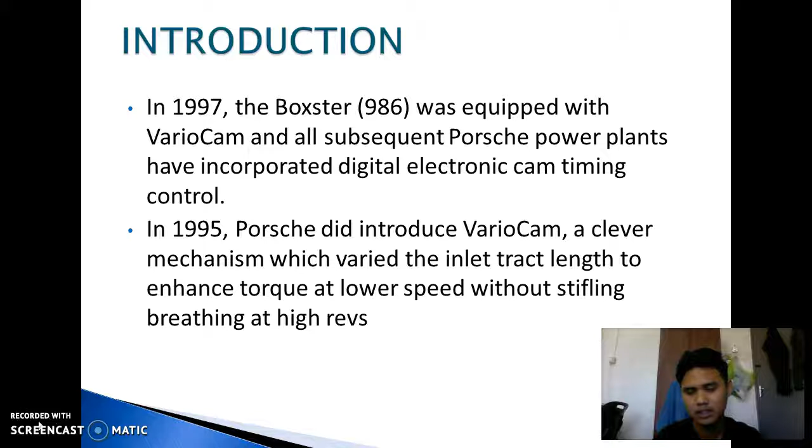So the Variocam system is very simple. They only adjust the intake valve, which can adjust the opening and closing, how big or how small. But for the exhaust valve, it is already fixed.

So this is the theory of operation of the Variocam system. This is the basic system of the solenoid. Here is the mechanism of how the solenoid moves upward and downward. Before that, let's see a video first to better understand how this solenoid works.

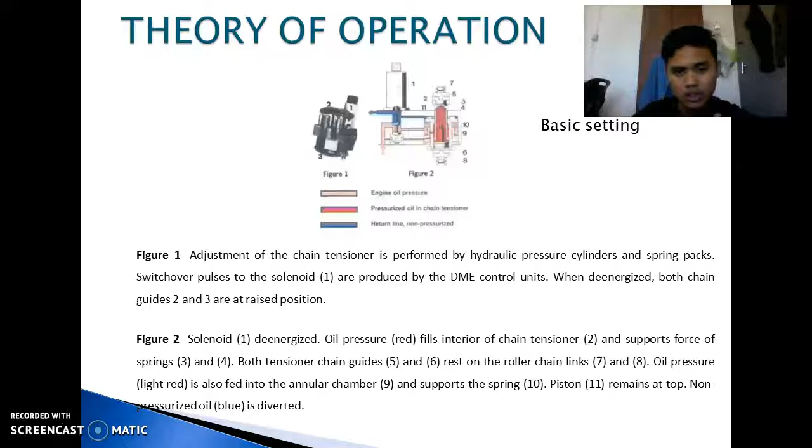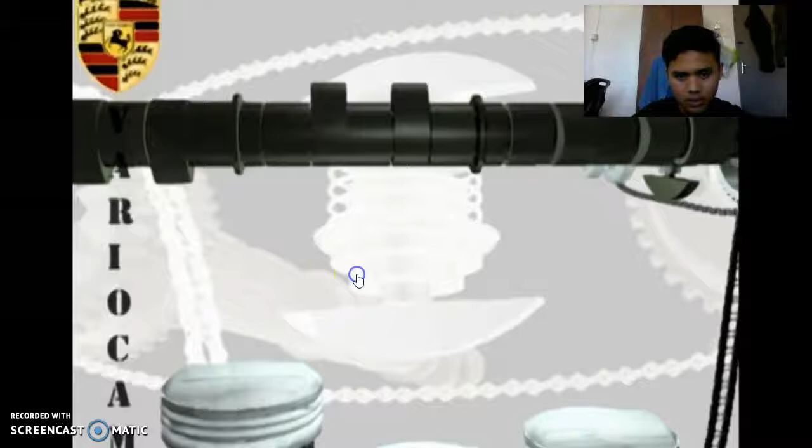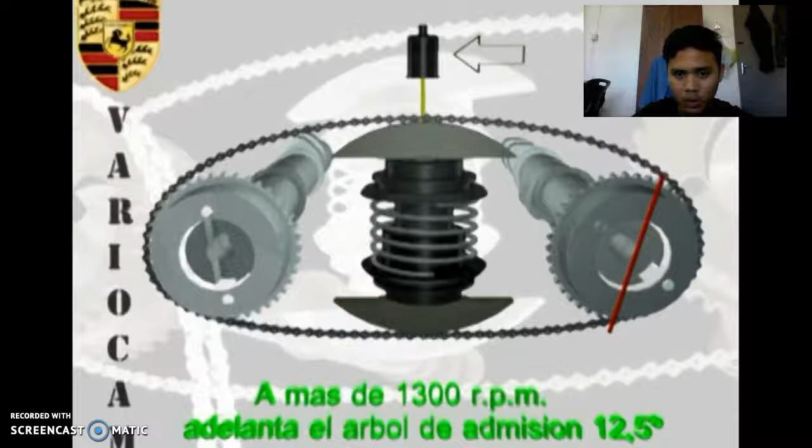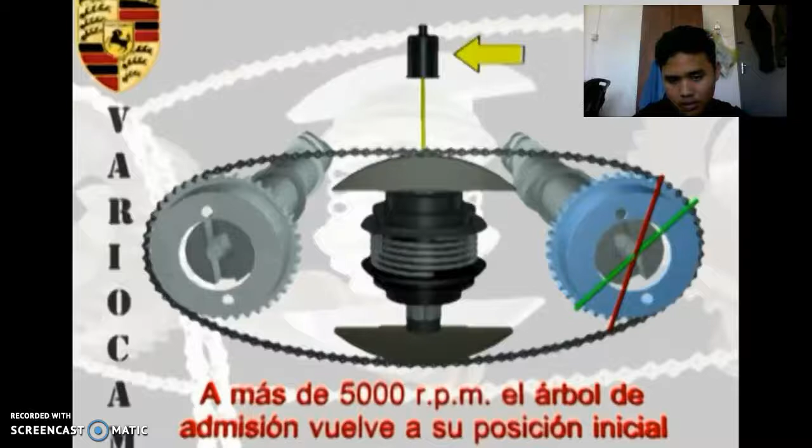So this is the arrangement of the camshaft and the piston and so on. This shows how the solenoid goes upward and downward, and what effect this has. For 1300 rpm, the solenoid will go downward. For 5000 rpm, the solenoid will move upward, and this can affect how the valve opens and closes.

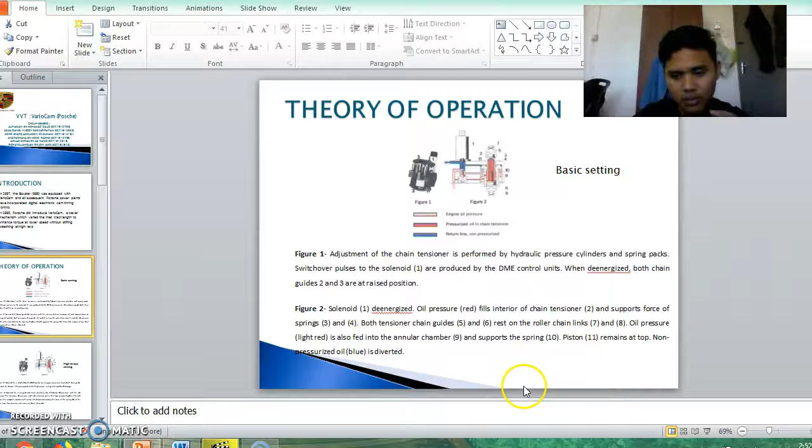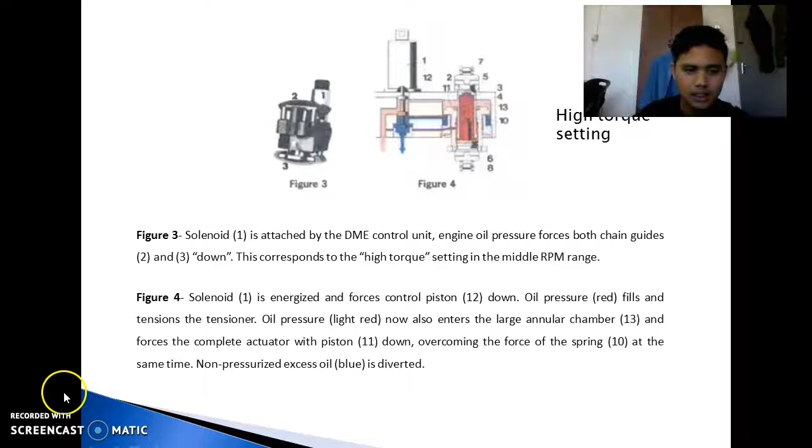So next, this is the high torque setting of the solenoid itself. This is the mechanism of how the solenoid goes upward and downward for the high torque setting. So this is the diagram for the Variocam.

After Variocam, Porsche introduced the new technology, which is Variocam Plus. Variocam Plus is more complex than Variocam because in this part they have 3 cam lobes. Let's watch this video first to see how it works.

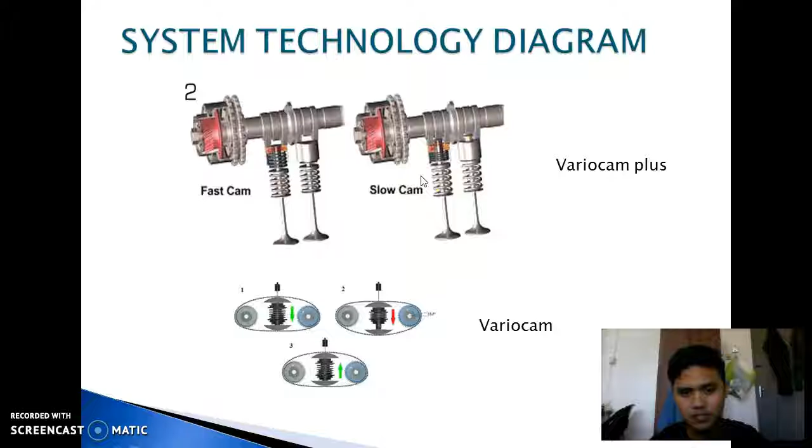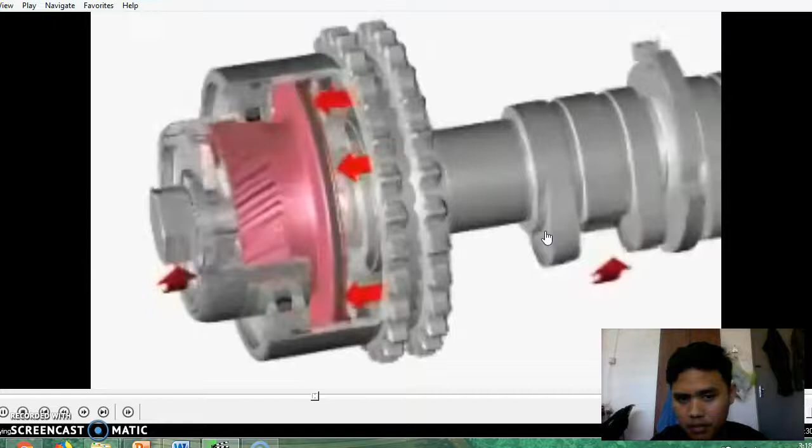Okay, this is the setup for the Variocam Plus. Let's see here, it can change the coordinate of the camshaft to the left and to the right. So how does it happen?

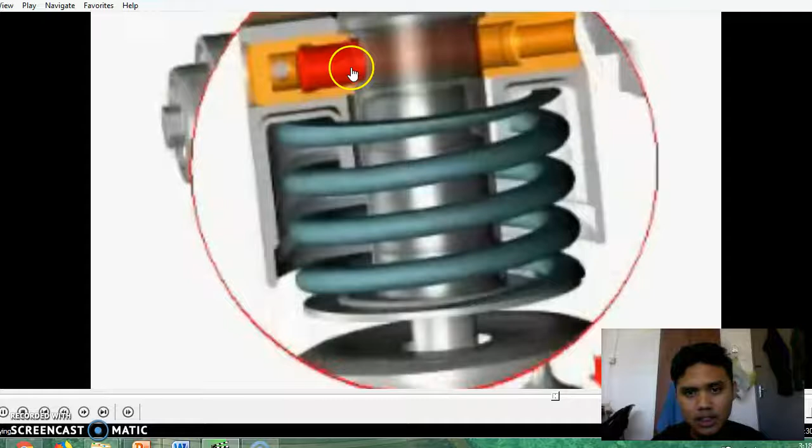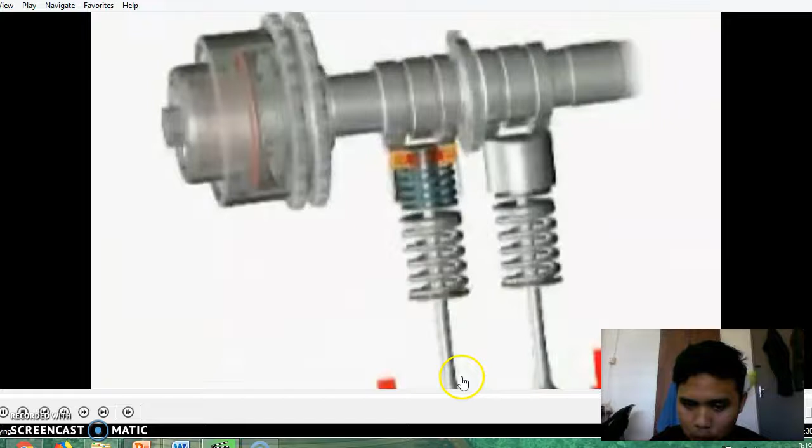This is for low RPM, where the valve will open only a little bit, so it can save more fuel at low RPM. As you can see here, there's a solenoid or hydraulic valve. For high RPM, the valve will open bigger, so the gap between the valve seat and the valve itself will be larger. So that is how it works.

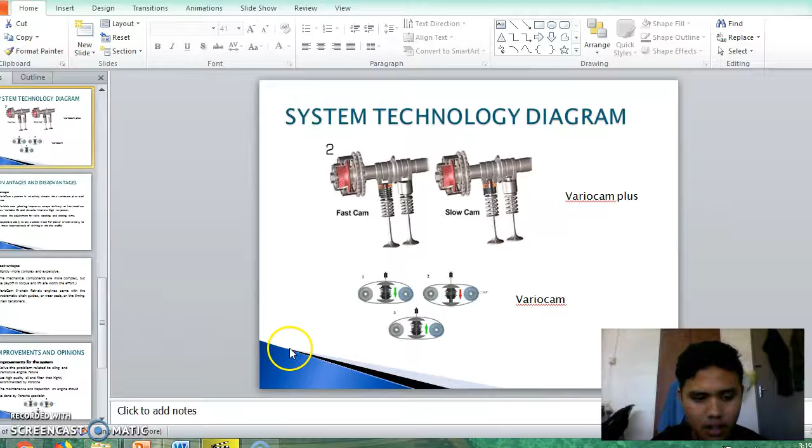So here are some advantages and disadvantages. For the advantages, the Variocam system is relatively simple compared to Variocam Plus, which as we saw previously includes the mechanism for how the valve opens and closes. For the Variocam system, they only have the mechanism to tension the chain and loosen it. Second point,

variable cam phasing improves torque delivery at low or medium revolution. Variable lift and duration improve high revolution power. Thirdly, it allows precise adjustment for valve opening and closing time. And lastly, it responds quickly to any sudden need for power, or conversely to a more reserved style of driving in city traffic.

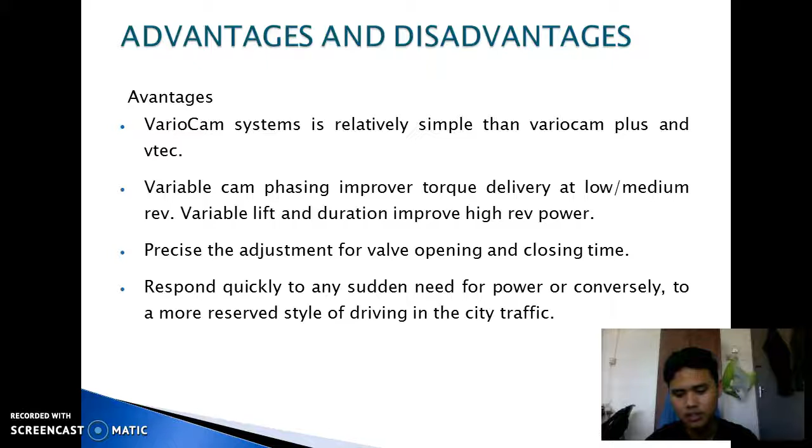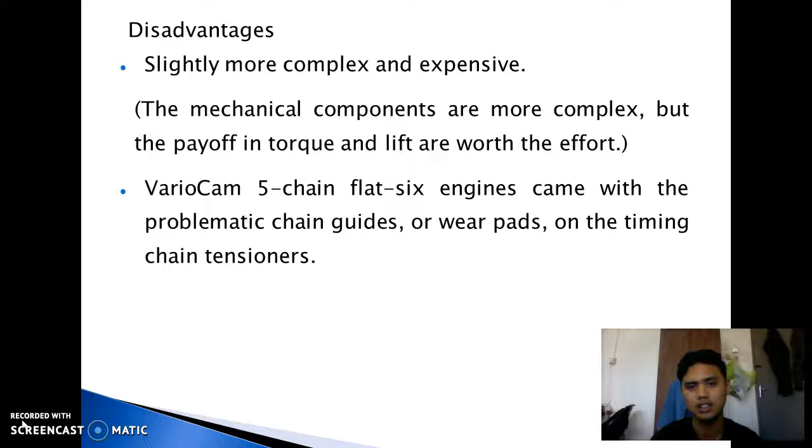So next, for disadvantages: first, it's slightly more complex and expensive, since the mechanical components are more complex, but the payoff in torque and lift is worth the effort. Secondly, Variocam's 5-chain flat-6 engines came with problematic chain guides or wear pads on the timing chain tensioner. That's the advantages and disadvantages of the Variocam system.

So here are some improvements and our own opinions toward this system. For improvement, maybe Porsche should come out with a solution regarding the problem related to oiling and premature engine failure. This is common feedback that Porsche gets from customers for this system.

Secondly, the user should use high quality oil and filter that are highly recommended by Porsche. As we know, high quality oil can absorb high temperature, and the capability of high quality oil to absorb high temperature is very good compared to low quality oil. So why do I say this?

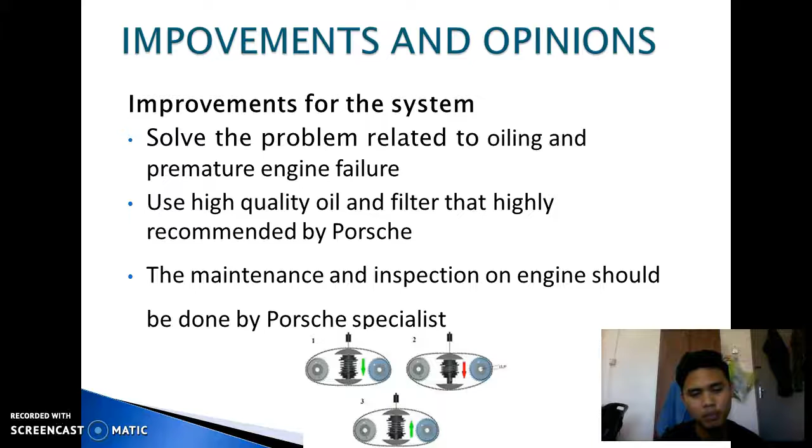So that's some improvement that Porsche can take action on. So lastly, for maintenance and inspection, the user should go to a Porsche specialist, because Porsche specialists can do proper inspection and maintenance on their car.

So finally, here are some of our opinions about the technology in the future. Due to the continuously increasing fuel price, it's not impossible that the internal combustion engine will be replaced by the electric vehicle, because electric vehicles just use electricity, and we know that electricity is lower cost than fuel. Secondly, electric vehicles can also reduce more emissions compared to ICE vehicles.

As we know, electric vehicles don't have components such as a valve or a piston. So in electric vehicles, they don't need a combustion process which produces hydrocarbons, carbon monoxide, and so on. So electric vehicles are more green compared to ICE vehicles.